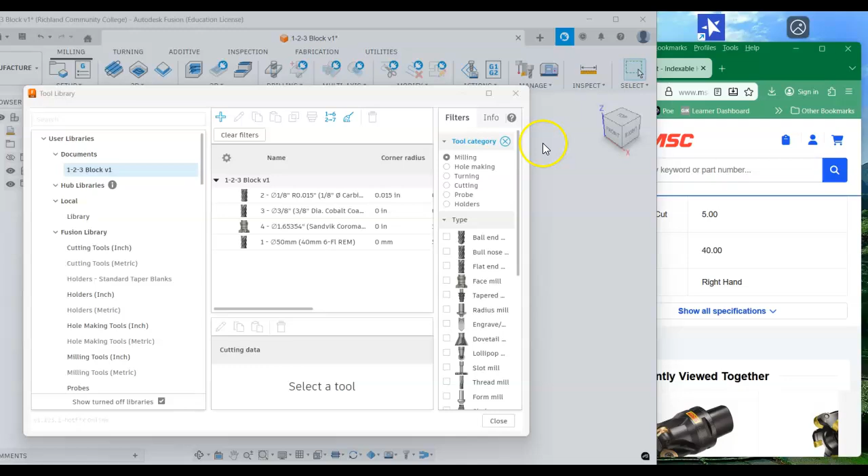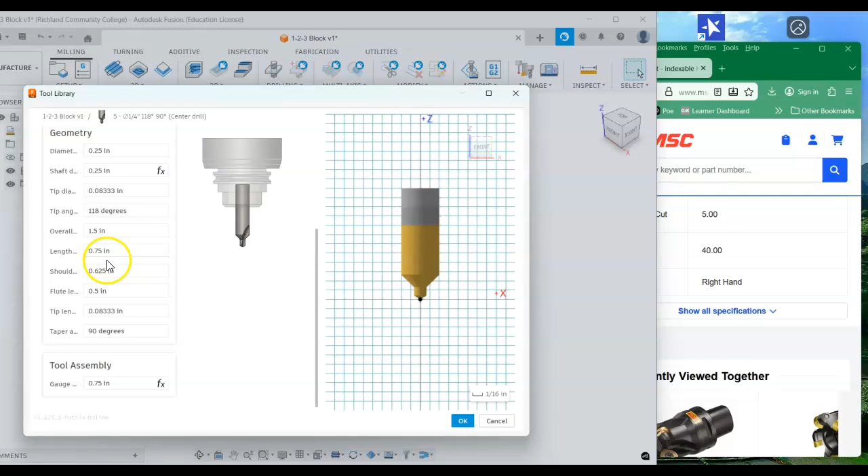All right, so the next tool we're going to add in this tool video series is going to go into our hole making. The drills are pretty simple, center drills. So, well, I'll let you guys kind of play around. We'll take a look real quick here so you can kind of see center drills. Again, it's just a matter of filling in the data here in terms of the geometry of the actual cutting tool, and the shaft and the holder and such with that.

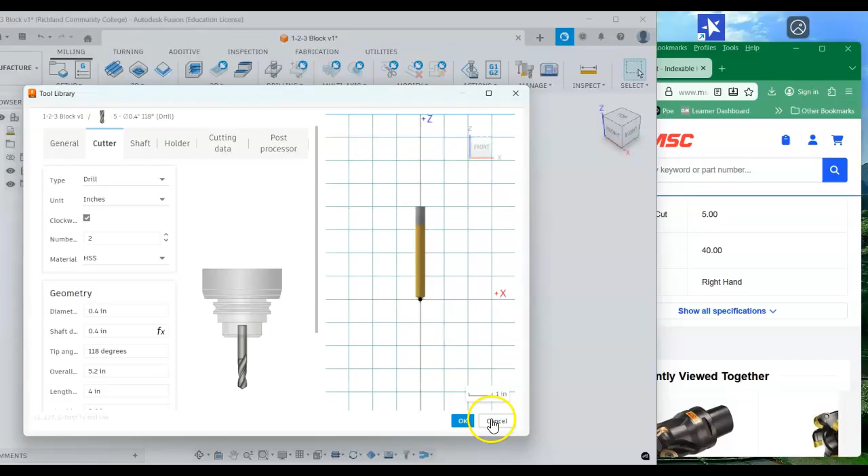So let me cancel out of this. Let's take a look real quick at the actual drill. Same thing here, it's just a matter of filling in the geometry of the actual cutting tool. So let's take a look at your spot drill. So again, just a matter of filling in the geometry, the diameter, the shank diameter, the tip diameter, the tip angle itself. Oftentimes this is going to be anywhere from 120 to maybe 90 degrees. Overall length, shoulder height, flute length on that one.

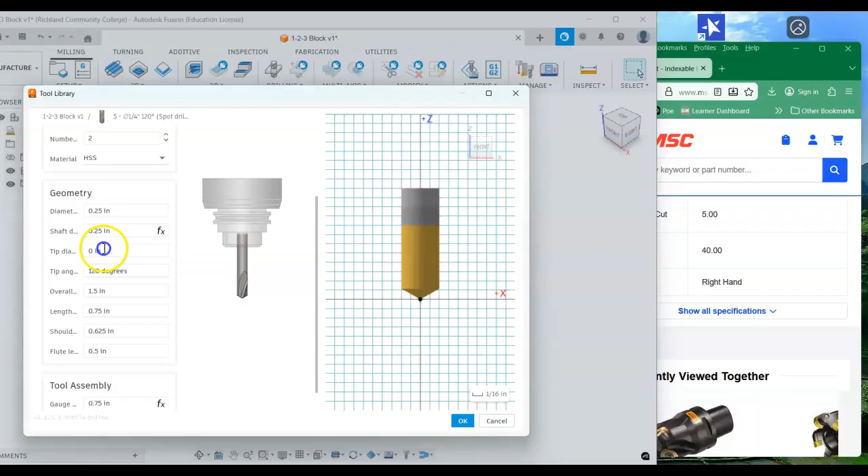We'll come back to some of the others, but the one I really want to do this video on right now is the counter bore and bringing in the counter bore. So let's take a look. We're going to stay in the MSC catalog right now. I'm going to expand this out. We're going to search for counter bore, so just type in counter bore into the search. Notice we've got interchangeable pilot counter bores, solid pilot counter bores, solid counter bores. Next bullet, if we click on here, we can get counter bore sets. For right now, I'm just going to go to solid counter bore.

And we could break this down by size. I want you to notice, remember, the purpose of a counter bore usually is for the head of a screw, especially a socket head cap screw, to fit down into and make sure that the head of the screw sits below. So as you take a look at some of these, with the solid counter bores, they usually will show the actual size of the tool.

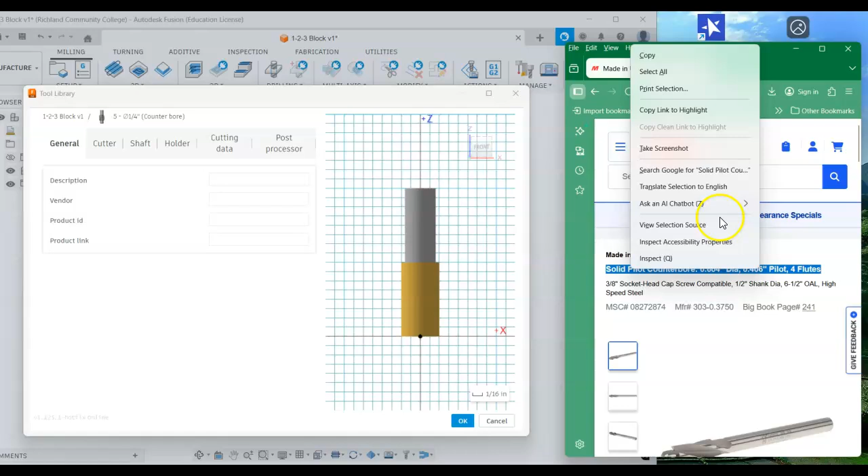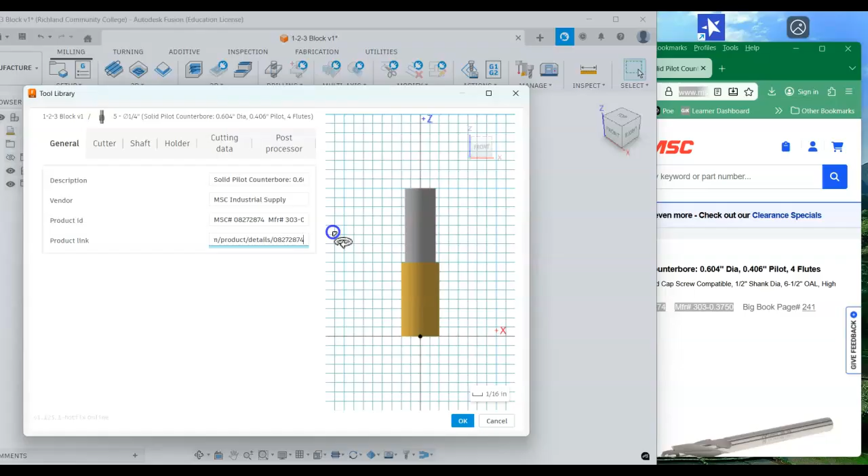So we're going to start to put this in here. I'm going to copy this over. This is going to be a solid pilot counter bore. Notice in this case it's 4 flute. We'll paste this description into here. Vendor for this again is MSC Industrial Supply. We'll use their product ID number, the MSC number, and of course the manufacturer. And I can also include a product link here, which is a nice feature to have, so I won't forget where I was originally looking at that from. So that's that information. Let's head over to the cutter.

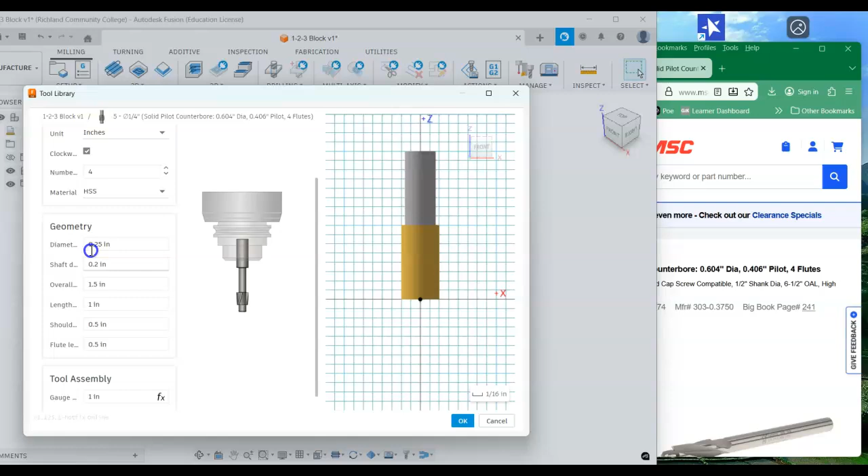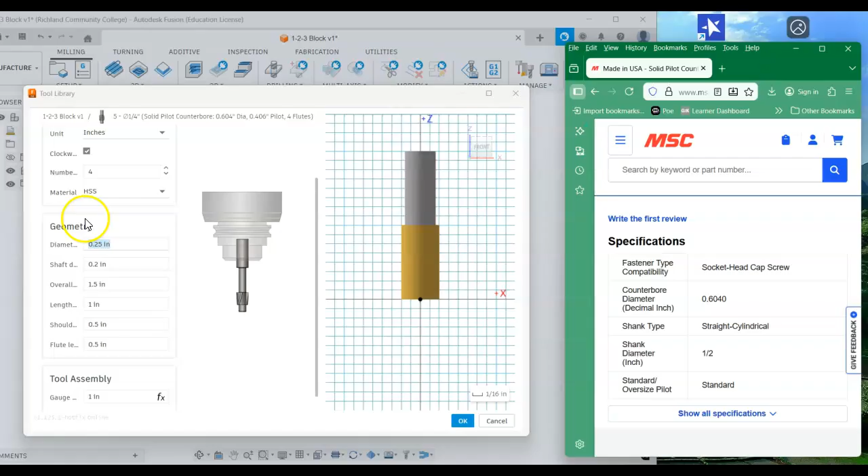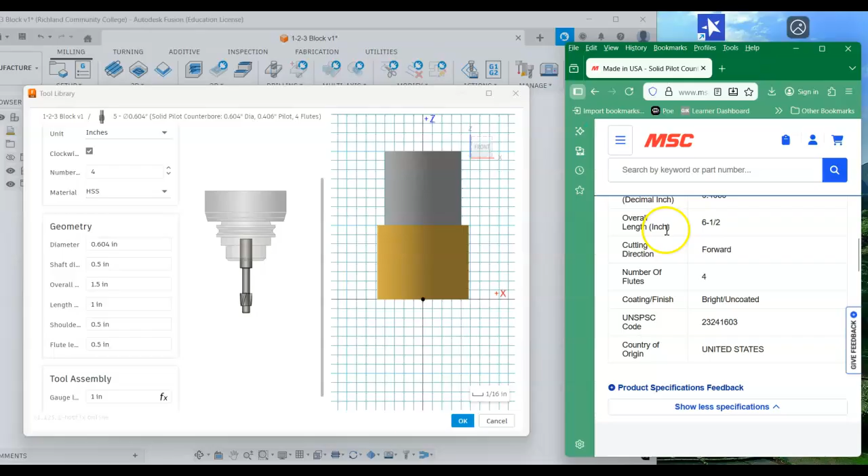All right, so we've got a counter bore. It's in inches. There are 4 flutes, it's going to be rotating clockwise. It is made out of high-speed steel, so far everything's good to go. Now we talk about the geometry of the counter bore. Come back over here to the actual specifications. In this case, the diameter is going to be 0.604. The shaft diameter is a half an inch, so 0.5. Overall length was 6.5 inches. The length below, we're probably going to want at least 2, so we'll say 4.5.

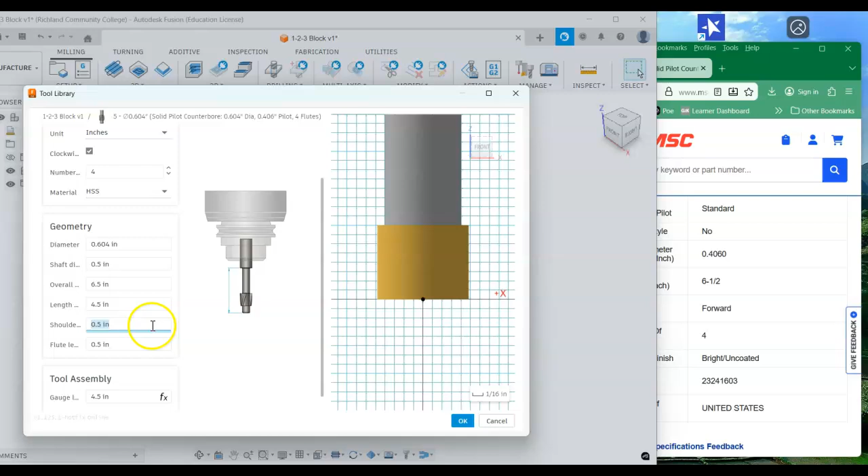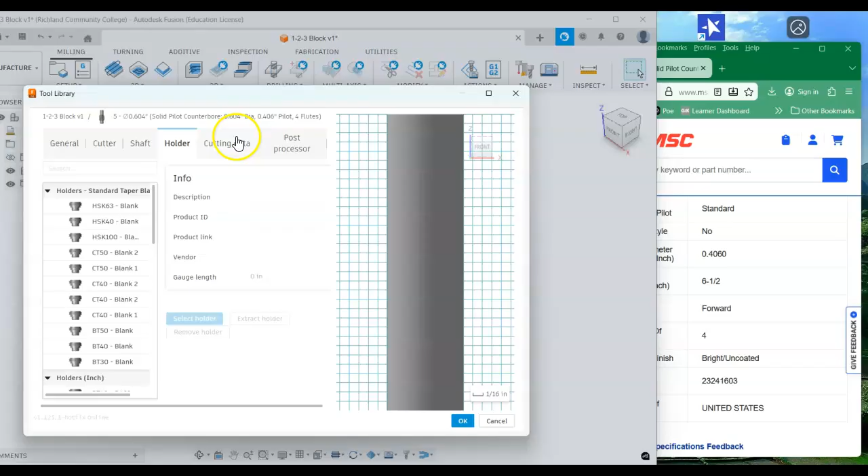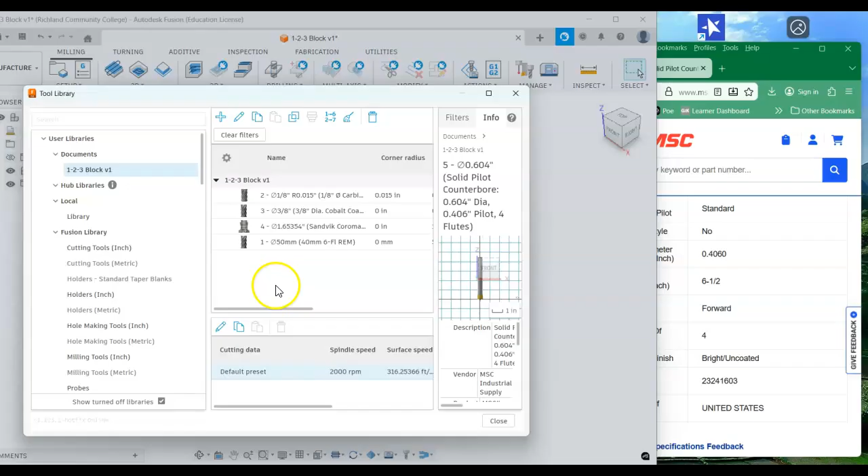Sometimes this also is going to depend on how much clearance you have in the Z-axis too. Here's the shoulder. We can just leave that as is. Same thing now with the flute length too. So we've got that information. Let's take a look at the shaft, holder, cutting data. Again, our maximum RPM is going to be 2,000. That's going to change depending on the material that we're cutting. 5,000, that's probably pretty good. And then the post processor numbers, turn off the live tool data, and we'll hit OK. And now I've got a counter bore in there as well.